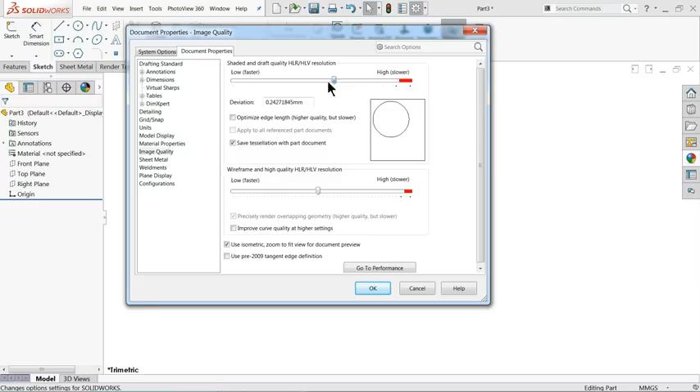Go to file, select new, and here select part. Now let me select white plain background. I'll go to option, documents, property, and image quality, and keep image quality higher.

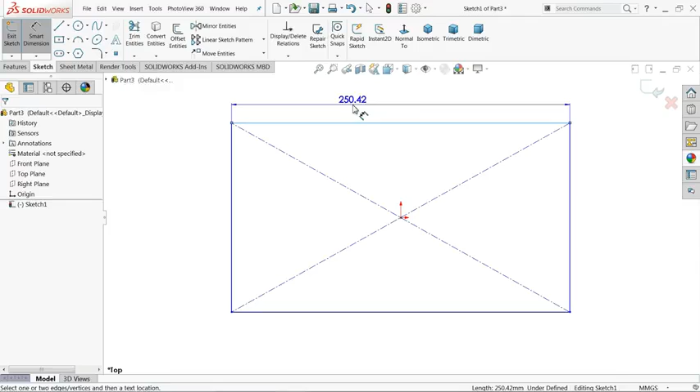Now I'll start with top plane sketch. I'll choose here center rectangle and start with origin point. Right click, select smart dimension. Now this upper one is 92 millimeter and this length 68 millimeter. That's it.

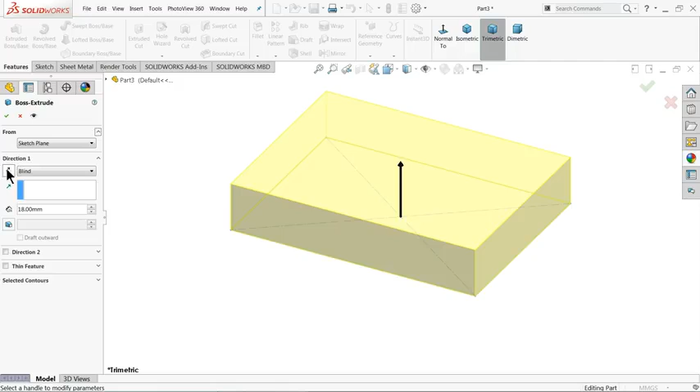Now simply select exit and go to feature and select extruded boss base, and we want to extrude here. Direction 1, keep blind condition 18 millimeter in upward direction. Don't go reverse, let's try upward.

Let me select this part and I'll assign some material. So I'll choose here brushed steel. Polished steel also, but let me choose brushed steel.

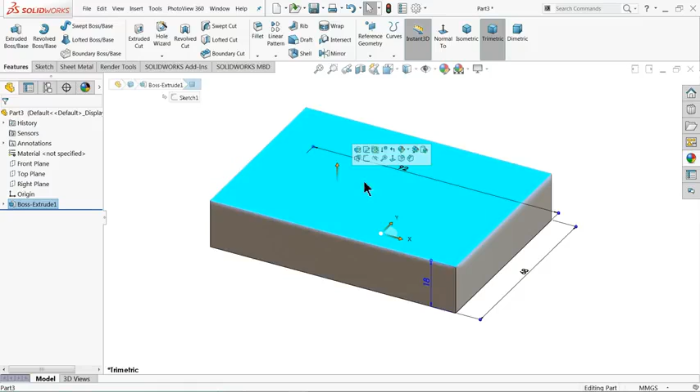Select this face, sketch normal, and here two holes we need to create. So let me select here two holes, 1 and 2.

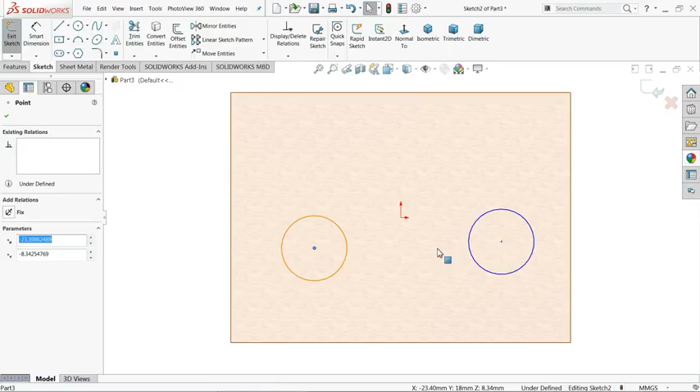Now select both the holes and create a relation. You will see here equal. Okay, now select both the circles, center point horizontal.

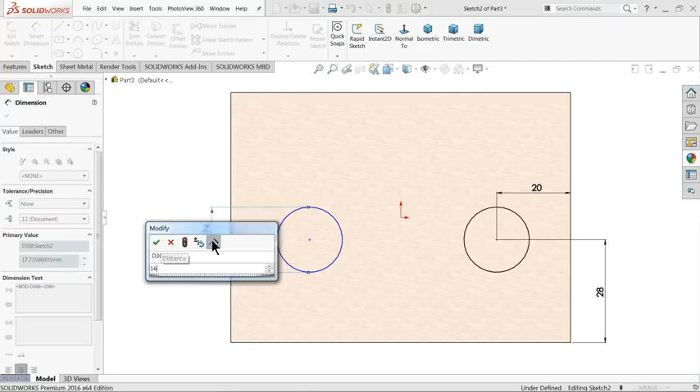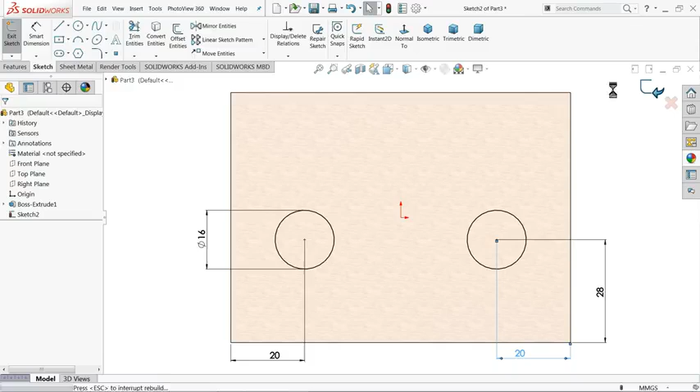Now select exit and go to feature and select extruded cut, isometric view, and we want to cut. Let me select here blind condition, end condition through all.

Okay, now let's see. Now see 16 millimeter dia, 20 and 28. This is the hole size.

Now it's time to make this side wall. This side wall is 53 millimeter long. We will make first this bottom 18 millimeter radius, 12 millimeter thick, and this corner have 6 millimeter radius. That's it. And the distance, total distance is 125 millimeter from one end to center or end of this wall.

And if we will minus 125 minus 68, and here radius 57 balance, then if you will choose minus plus R6, it will go around 63.

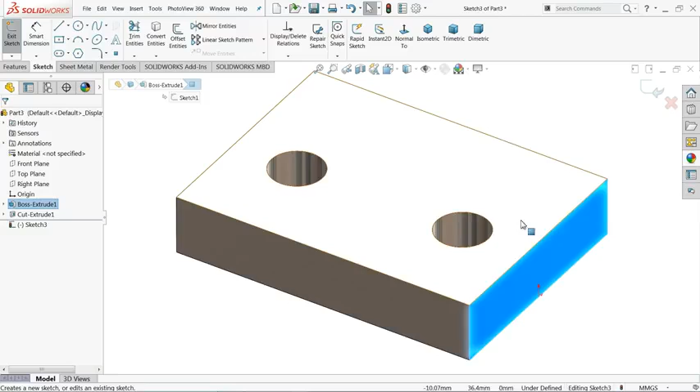I'll select this face, this sketch normal. Now let me start from here. Select the line and start from here. Smart dimension.

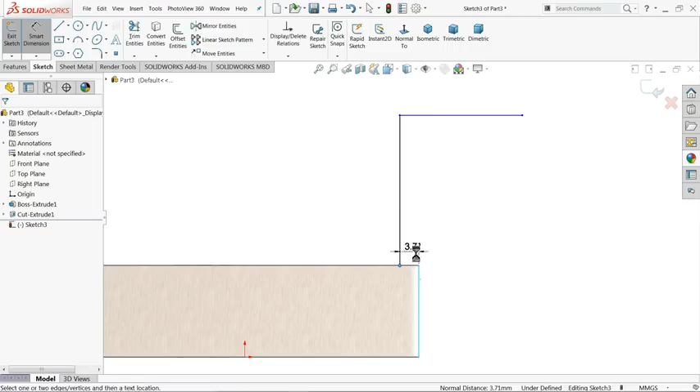Here we will select the line, 6 millimeter radius, 6 millimeter gap, because here 6 millimeter radius are there, and this distance 53 millimeter, and the upper one keep 63 millimeter.

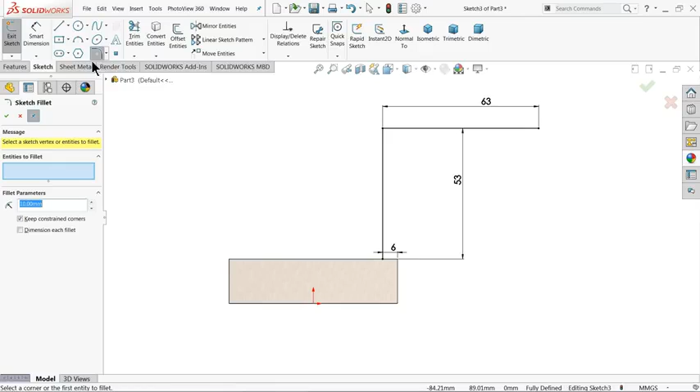Let me choose fillet 18 millimeter and select this corner.

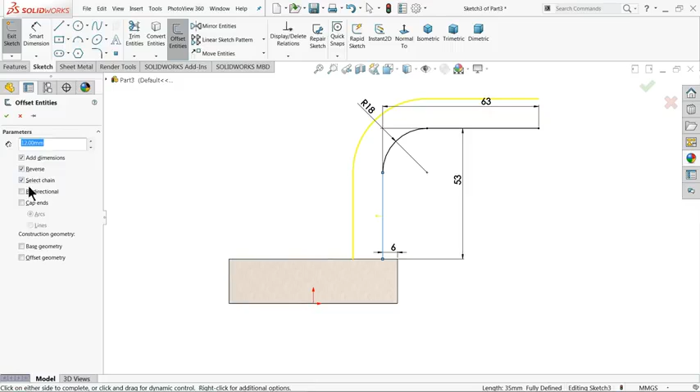Now select here offset entities, keep 12 millimeter and select this one. It's going inside, so select here reverse direction, and check this all the boxes, add dimensions and select chain. Okay, select here line and close the geometry from both the end, from here to here and from here to this point. Right click, exit.

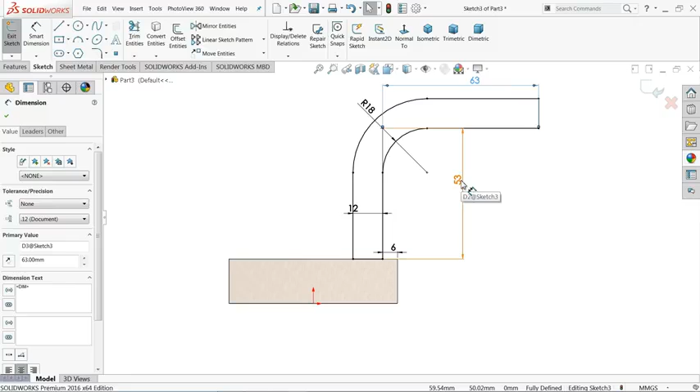Now here we need to make one radius. Select fillet, keep 6 millimeter radius and select this corner.

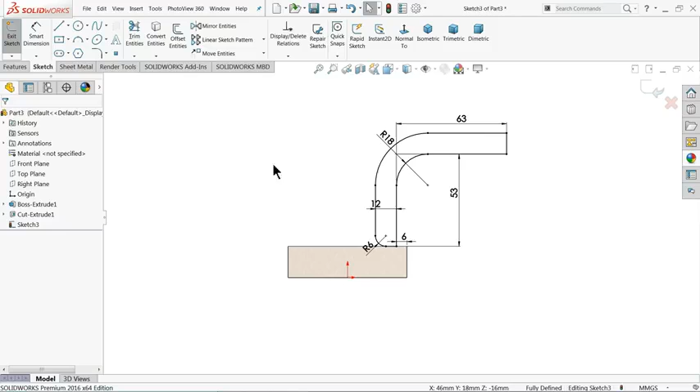Here we will later define radius. So this is the fully defined sketch. Select OK and let me extrude.

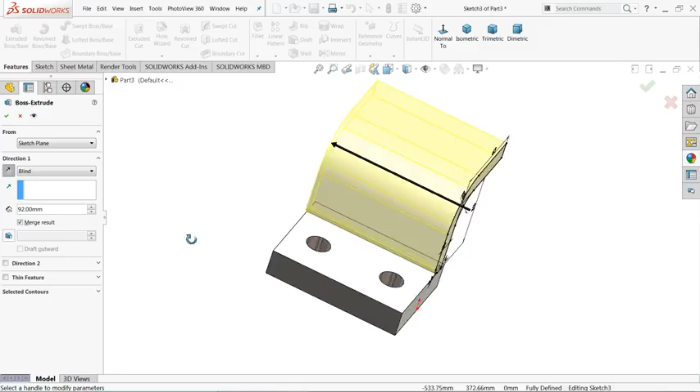Select extruded boss base and extrude up to, take reverse. Either you can select through all, or even you can, if you want, define the thickness, length 92 millimeter. It's up to you, see, either through all or distance.

Now let me choose here fillet, keep radius 6 millimeter and select this corner. Now see, it's fully defined radius.

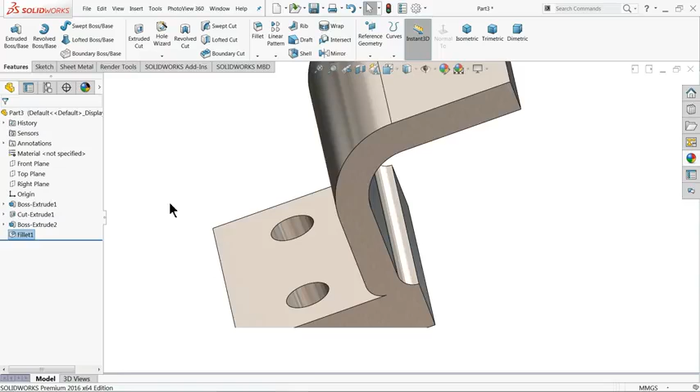Now this looks similar to the geometry. At the corner you will see R6 at both the end, so this is a little critical.

12 millimeter is fine. Now it's time to create this 80 millimeter outer radius, diameter, and inner 40 millimeter, and the thickness from top to bottom is 55. So here 12 and bottom shows 6, so 6 plus, if we will choose one space, then 18 plus 37. You will understand, let me draw.

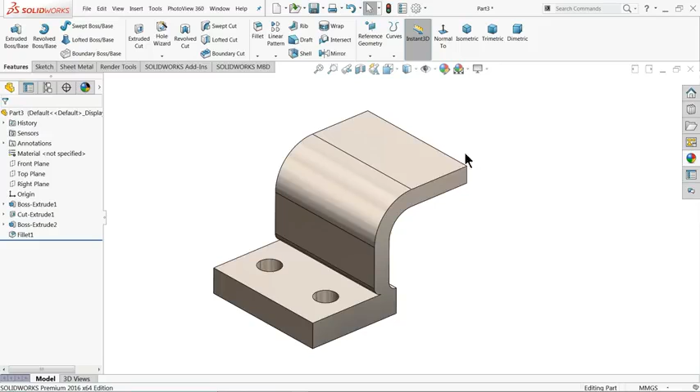Select this face, sketch, normal, circle, and find out here center point. Okay, now let me define this diameter 80 millimeter.

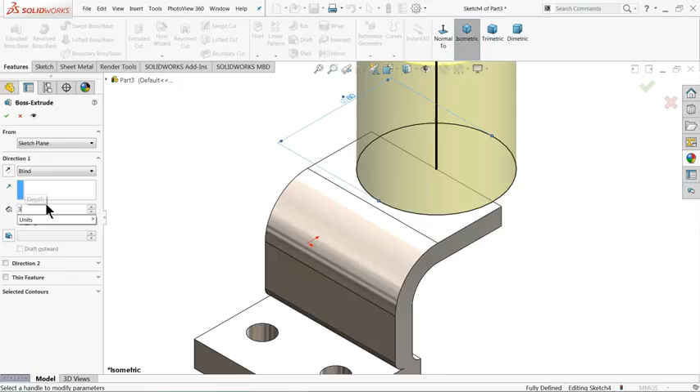Select isometric view. Now it's time to extrude. Extruded boss base. Now in direction 1, we will select 37, because total 55 millimeter length, so 55 minus 37, 18 millimeter. So choose here direction 2, and direction 2 let me select 18 millimeter only.

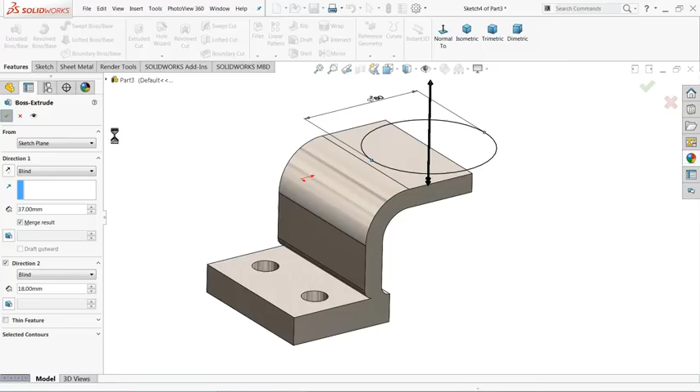Now there is a hole, so let me select the top face, sketch, circle, and just keep your mouse near to circle and you will find out a center point. Just click on center point and draw a circle, a smart dimension, and this diameter is 40 millimeter.

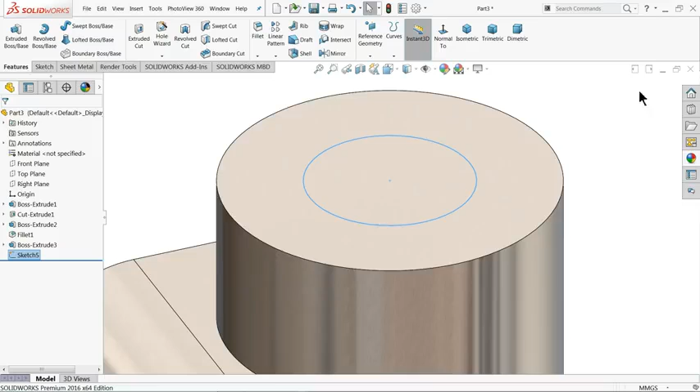Okay, now simply select exit. Either you can, if you don't have time, no need to select every time exit. Directly you can choose extruded boss and extruded cut command. So I'll choose here extruded cut, and here I'll select through all.

Through all means up to this body, or even you can define the distance if you required.

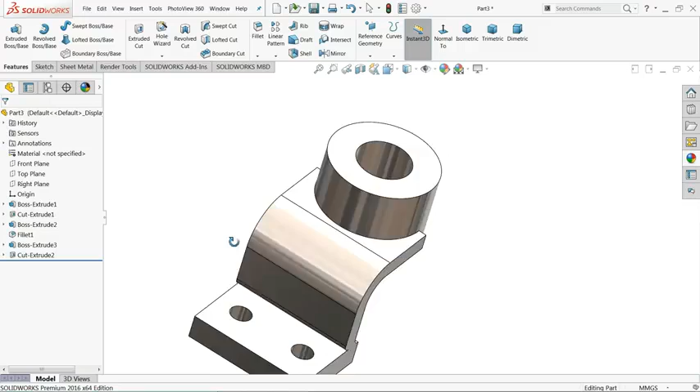See, now it's time to add rib. This is important and critical thing. See, this thickness is 14 millimeter, and here the corner, the distance from this edge to top 24 and 42 millimeter radius. So how we will do this one, let's check.

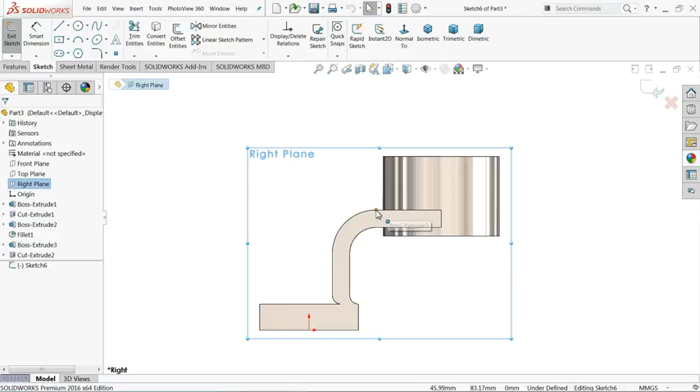Select right plane, sketch, take the normal from here or directly select from here. Okay, select line, start from here, 24, then here, then end with this point.

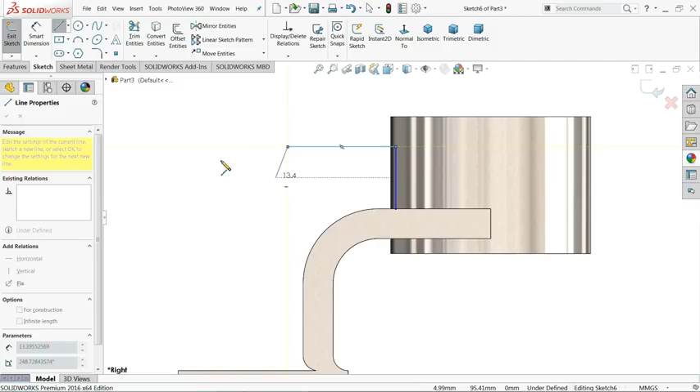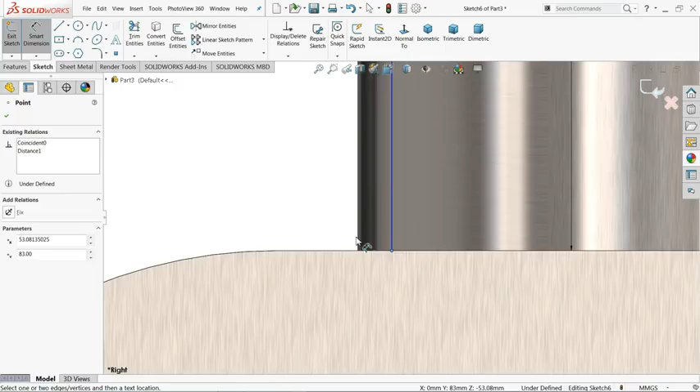Now select here smart dimension. First let me define this 24 millimeter, and let me choose the distance from here to outer edge, 1 millimeter.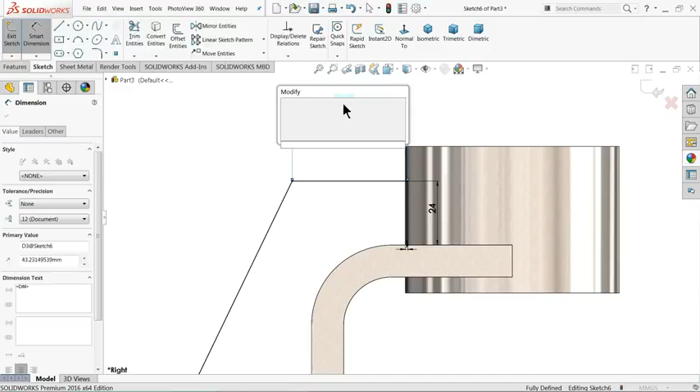And select this line as a construction geometry. We don't need to define this line. Smart dimension, 42 millimeter, the radius. Now see, this line is created, exit.

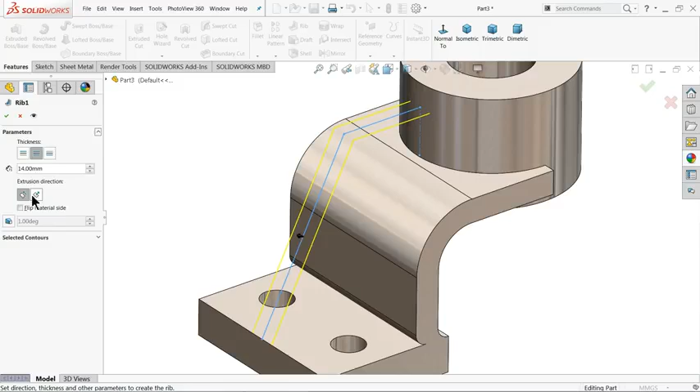Now we will try rib command. So select here rib. Now see, the rib command is already selected. Keep mid thickness both side, and thickness actually 14 millimeters. See, arrow is coming upward, so select flip material side, select OK.

Now look, the rib is created. Now here we will define the radius and everything. Let me choose fillet. First we will define 42 millimeter, so we will select this one as 42 millimeter.

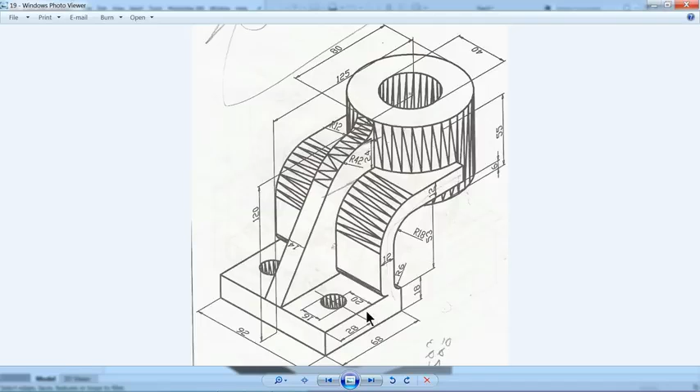And the last one is 12 millimeter. That's it.

So this is how we make a simple model in SolidWorks. I hope you like it.